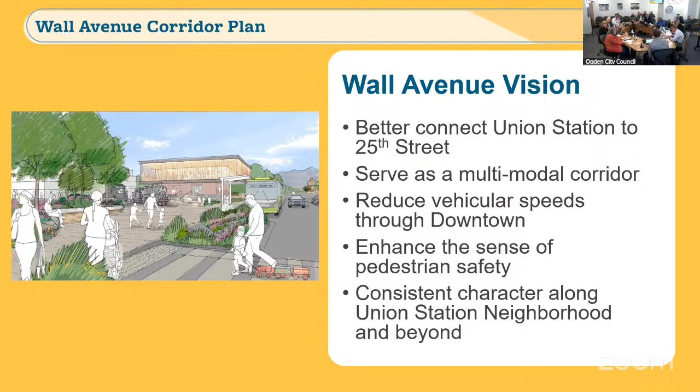As part of that, as we looked at Wall Avenue, we made sure to take into context the plan for the Union Station neighborhood and what is being proposed in this area and how it would impact Wall itself.

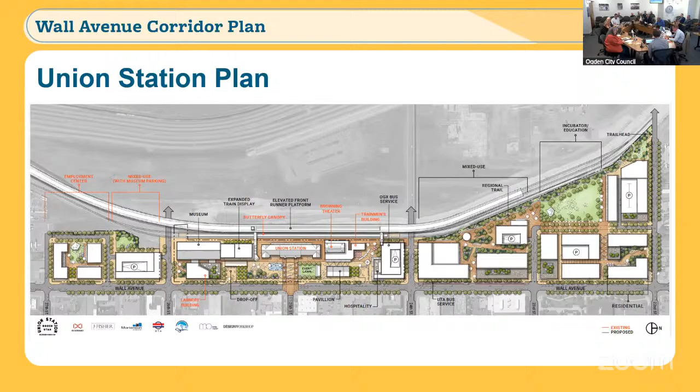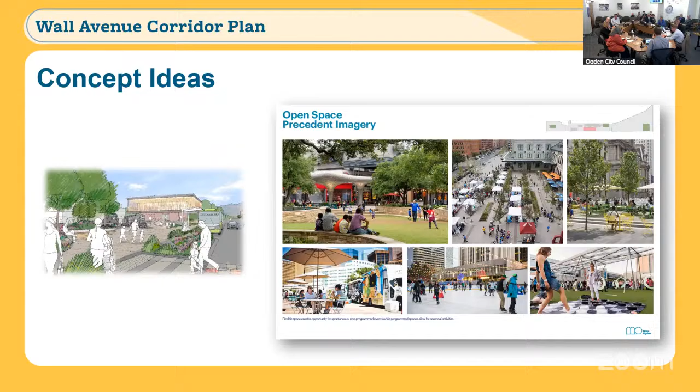Some of the concept ideas we looked at were ensuring everything we did was in line with station plans, the Union Station neighborhood development, and other areas. This is that open space imagery, that concept that has been proposed. And also how do we make active ground floors, active pedestrians, and make it an open spot where people feel comfortable walking.

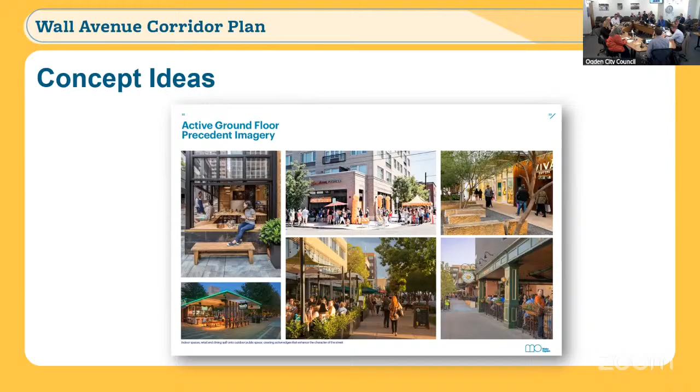Right here is one of those Union Station neighborhood concepts. It shows a lot of open space, a lot of vegetation, really a change into the downtown area through Wall Avenue.

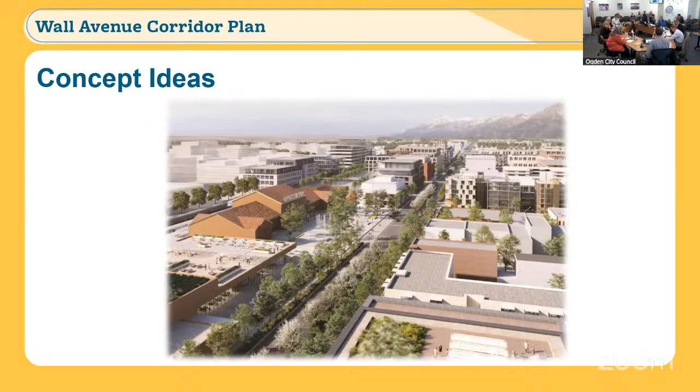The purpose of this project, as we kicked it off, was how do we enhance this vision. There's a vision for Wall Avenue and how it ties into the Union Station area. Particularly, I'm going to focus today on 22nd to 27th Street. The project looked at the entirety of Wall.

So how do we advance this vision through traffic analysis, determine what are the opportunities, what limitations, what is feasible and what's not, and then provide UDOT, because this is a UDOT roadway, with the foundation they need to make changes in the future, so that their changes align with the changes the city wants to make.

As we did this, the Union Station goals were making safe crossings of Wall Avenue, making it multimodal transportation, and using a variety of land uses.

One of the key aspects of this project was to engage a wide variety of stakeholders, including various folks at Ogden City. We had UDOT, a lot of Region 1 staff, UTA, Wasatch Front Regional Council, and several consultant groups - myself and Kimley Horn folks, Design Workshop, and J. Fisher Companies.

So there were multiple phases. This advisory committee was there to provide input, and then we took what we found to the citizens to get their input.

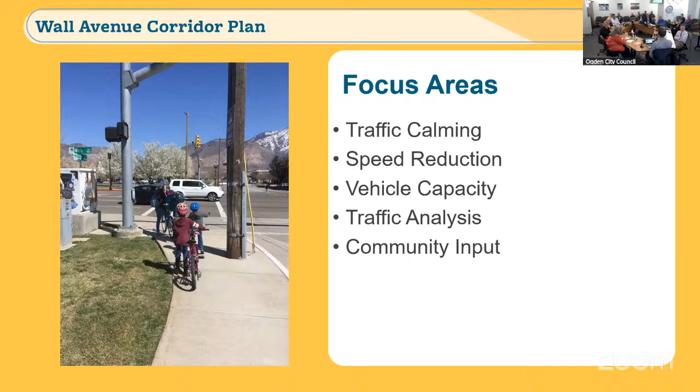We analyzed that traffic and brought this to the community for their input and feedback, through a variety of meetings including participating in Make Ogden. With this focus and with the advisory committee, we came up with several concepts. These next few slides will show you an overview of each concept, what's in it, and some of the pros and cons that we took to our stakeholders to consider.

This one has a big focus on pedestrians. There's always a potential you can just build an overpass, some sort of bridge structure to get them across Wall Avenue.

With this concept, other things would need to be done in coordination with it, but as we looked at this, yes, it does improve pedestrian safety, but it doesn't encompass all the things that we'd hope to capture on Wall.

The 255-foot approximate length needed for the ramps to meet ADA requirements would block vehicle and retail access on the streets where those ramps are, as you can see here. That's almost a third of a block.

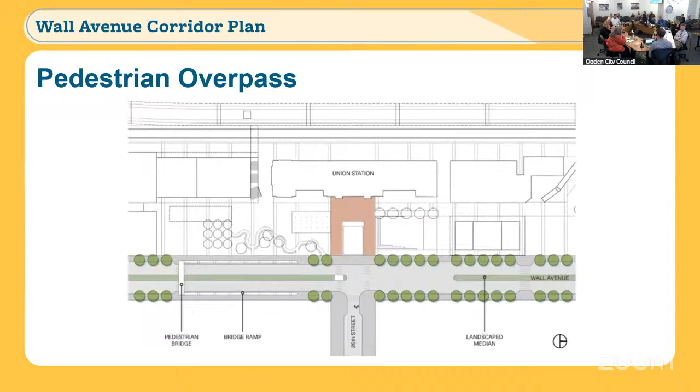It eliminates on-street parking where those ramps are located. It eliminates trees, amenities, and other items in those zones. And it doesn't really allow for biking infrastructure if you did it.

So this was one of those that, even though it was considered, it was not very high with the advisory committee or in the stakeholders' input, and wasn't one that received a lot of consideration moving forward. There were other options that they liked better.

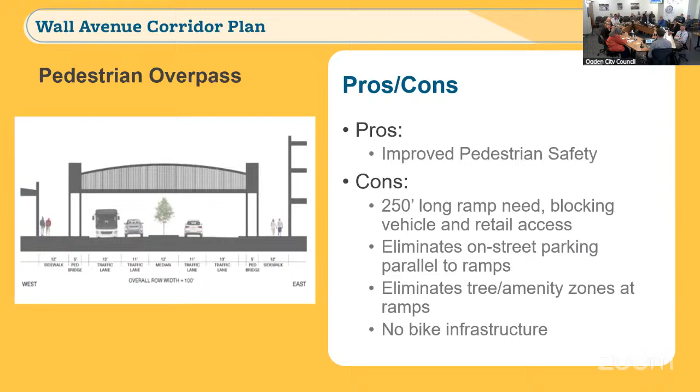Another one that was looked at is a bypass tunnel. Let's say we want to remove cars from Wall Avenue in this area at 25th Street, ramping them down. To do this, to get these ramps to not exceed the maximum grade and to get the clearance needed to have this pedestrian plaza underneath at 25th Street, those ramps would tie in somewhere around 24th and 26th.

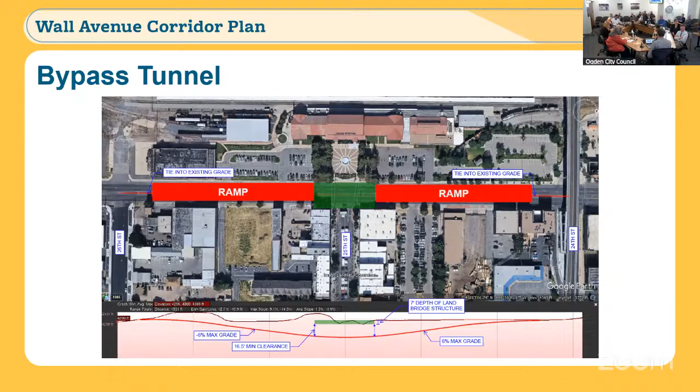There could be some changes—you could do it before or after those main intersections. But at a high level, as we talked with the advisory committee, it didn't appear like there was a big appetite to put all traffic underground. So that evolved into a bypass tunnel where there are 2 through lanes, one in each direction, as you can see in this concept, and 2 lanes that would stay at grade.

So you'd still allow vehicle access at 25th Street, or if they drop down before 26th and 24th, at those intersections.

Again, it creates much safer pedestrian improvements—there's a lot less exposure to vehicles. But as you can see, it would eliminate left turns from 24th to 26th and eliminates a lot of vehicle access. So say you were on 25th Street, you could only make a right turn and be forced to go north on Wall Avenue.

There would be a lot of major utility impacts and relocations due to water tables—a lot of dewatering required. It would be very costly and a very long-term time implementation.

This was an alternative that, for many aspects, had an appetite from the community and other folks. But one of the things we were tasked with is what can occur in the next 10 years, and this alternative felt like, even though it could be considered in the future, the timeframe and timetable mean it's not one that could be implemented over the next 10 years.

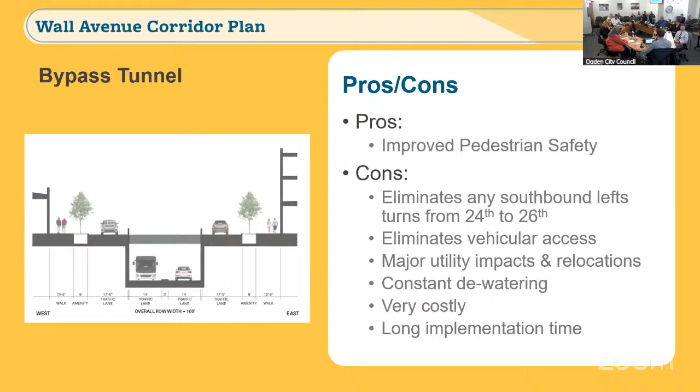Another one was what we call the Boulevard. What this does is create a large open space in the downtown area. You create this big boulevard, and as you can see here, it allows for a lot of trees and a lot of open space. It narrows the corridor down, which has those traffic calming features because you can narrow the lanes and create a tighter feel to the roadway, which naturally slows down vehicles.

But because of the median having no breaks, you're eliminating left turns on and off of Wall Avenue.

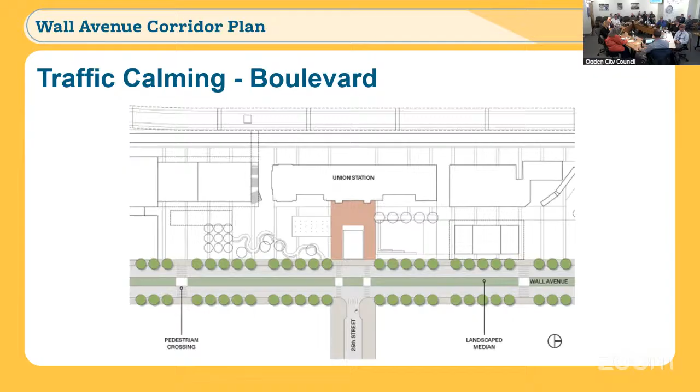It does provide the greatest opportunity for trees and improves safety, because pedestrians can cross two lanes and then have a safe space before crossing the other two lanes.

But it would increase travel times. People would have to find alternate routes instead of taking lefts, and it wouldn't allow for any on-street parking.

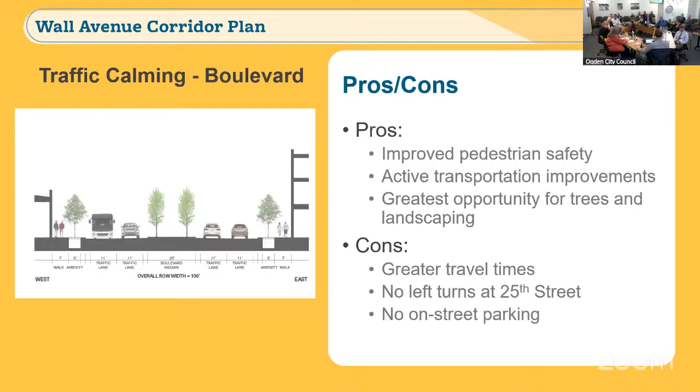So this is the first one that really implements these traffic calming features. We had three options that we looked at.

This one, traffic calming, included a lot of things like bulb outs, where you extend the on-street parking area at the intersections, extending the curb to bulb out farther. So when pedestrians step off the crosswalk, they're right there at the travel lane and don't have to walk through that parking area.

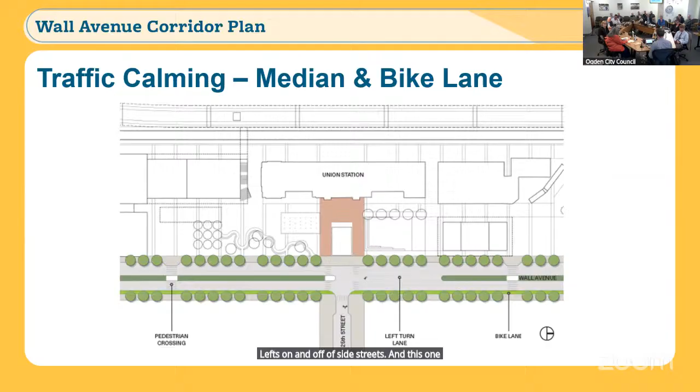And so this concept had the median. It allowed for those pedestrian mid-block crossings, and it also allowed us to break the median in key spots to include lefts on and off of side streets. This one focused on creating a bike lane, as you can see here.

There's a bike lane, so you remove some parking on one side to create a bike lane—not a multi-use path, but a bike lane—and then still maintain the parking on the west side.

This one's pros: it really did a good job of maintaining the throughput, the vehicle capacity. Because you're adding these traffic calming measures, you get improvements for all road users—slower speed, safer for the cars. You can increase the vegetation, the landscaping in this area.

There is a little impact to travel time, so vehicles would have a slightly higher travel time to get north-south, and there would be less on-street parking.

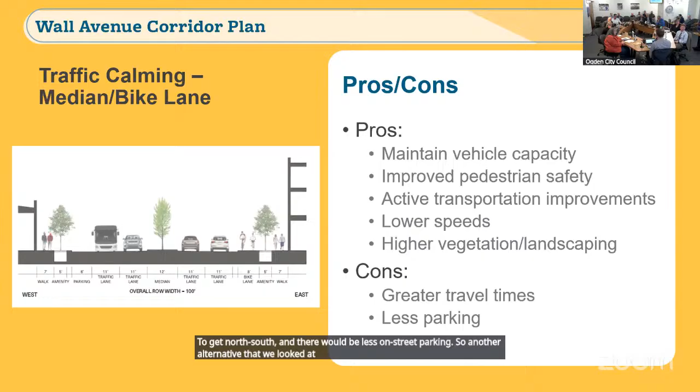So another alternative that we looked at was a modified version of this median. You've got the same features—the bulb outs, the mid-block crossings, the narrower lanes—things to help the driver feel like they need to go slower.

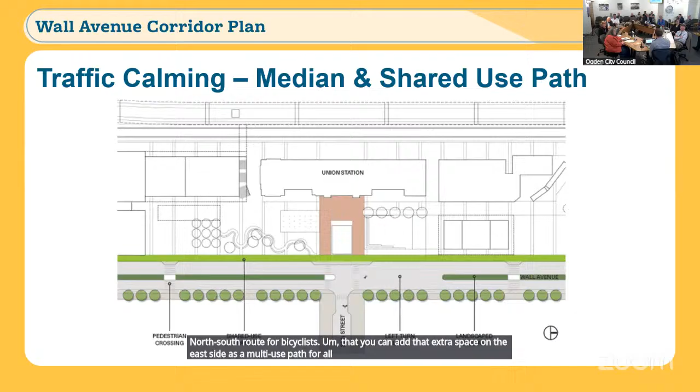But the concept here is that we create a multi-use path that bicyclists can use if they need to. Because we've done a great job of creating alternate north-south routes, Wall doesn't need to be the main north-south route for bicyclists, so you can add that extra space on the west side as a multi-use path for all active transportation users.

And so as you can see here, you've got a lot more space for those folks in that Union Station neighborhood. You still have the medians that improve safety and the bulb outs and these other amenities, but you can also maintain the on-street parking, which could be very critical as you're developing additional and new land uses along Wall Avenue to help those businesses.

So again, you maintain that vehicle capacity, you have the pedestrian and active transportation improvements, you lower speeds, but this is an alternative that is also quicker to implement. So it kind of falls into something that could be implemented within the next 10 years.

But again, due to the slower speeds and medians at some locations, there are potentials to increase travel times for vehicles. And in some areas, you're not able to get landscaping on both the east and west side just due to right-of-way constraints.

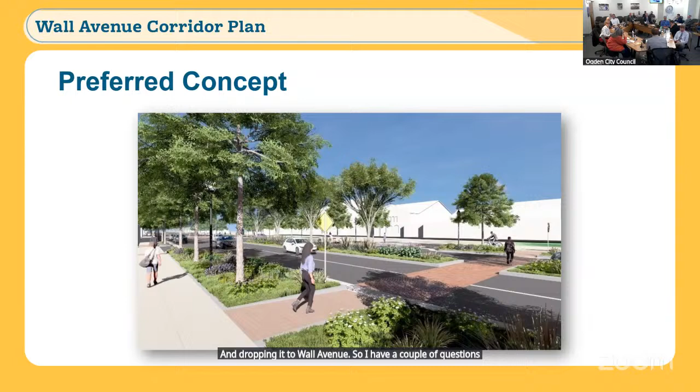I have a couple of questions. The active transportation corridor piece—is that in our bike master plan by any chance? Yes, it is. That's great, we don't have to change that.

Region 1 seems to be working a little bit better with cities up here—the 11-foot lanes might be a little bit slow for them, or not quite wide enough. Did you look at any other options besides the 11-foot lanes? 11-foot is done in some areas, but the 11-foot lane would require a deviation from their typical standards.

Part of why we're looking at that, 1 foot for each lane, is it just reduces the exposure to pedestrians. That's one of those details that would be ideal, because it really makes the road feel narrower, and the natural behavior of the driver is to slow down. So in our mind, that's a very critical piece of this.

Also having the trees, the vegetation, these bulb-outs that you can see here make you feel like you're getting pinched down, even though you do have sufficient room even for large trucks and semis to operate within those. It makes it feel restricted, so you will travel slower and it becomes a natural traffic calming.

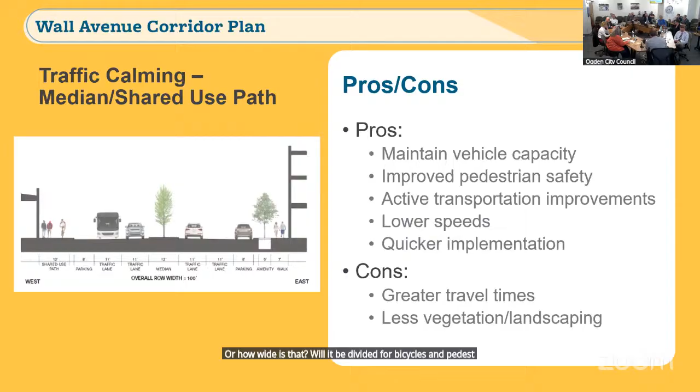There's several different ways you can do that. You can stripe it for bicyclists to use one side. It's that concept of that open space. It really requires the pedestrians and the bicyclists to be courteous and pay attention to one another. It's not intended to be a high-speed throughput.

Those folks would be on your streets that you've developed, on Grant, which is your main north-south, and improving the east-west connectors. So you would prefer those high-speed or commuter bicyclists to use Grant and then come over where they're trying to get to on a westbound route.

Okay, and I see in your rendering here, we've got a stripe kind of separating wheeled transportation from foot traffic.

Do you remember when we were in Germany, in Munich particularly, they changed how bikes and pedestrians shared the same width, but they changed the surface of the path. The bikes had a smoother surface. They used cobbles everywhere down there, but not on the bike lanes. That's how they made the distinction between the bike part and the pedestrian part, just by changing the surface.

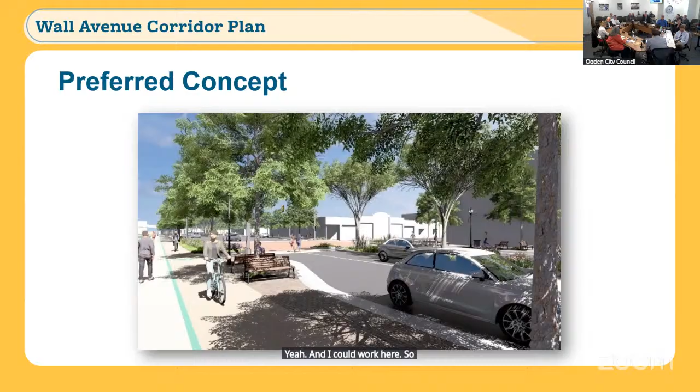I like the progress that's been made, and I like the preferred concept. I think you make good points around why it's the preferred concept when compared to the others. Thanks, so yeah, that's where we're at right now.

We're working with UDOT to make sure they agree with the analysis we've done before we finalize the report, and work on getting a corridor agreement in place with UDOT as a final step in the process.

That's probably where my question is — how do we get UDOT on board with a thing like this? Well, yeah, we've tried to involve UDOT throughout the entire process. They actually helped fund this corridor plan.

Ryan Halverson, he's the Region 1 planning manager, has been involved throughout the whole process. We've met with UDOT leadership twice and received their comments, and now we're currently waiting on their second set of comments. We're trying to resolve all the concerns that they have.

We're hoping to do a corridor agreement so that what we show in the plan is what will be supported by UDOT — that's our ultimate goal. We don't want to adopt this plan without a corridor agreement in place, because it really doesn't do much. So if the city is behind this, I think that will go a long way. We feel like—

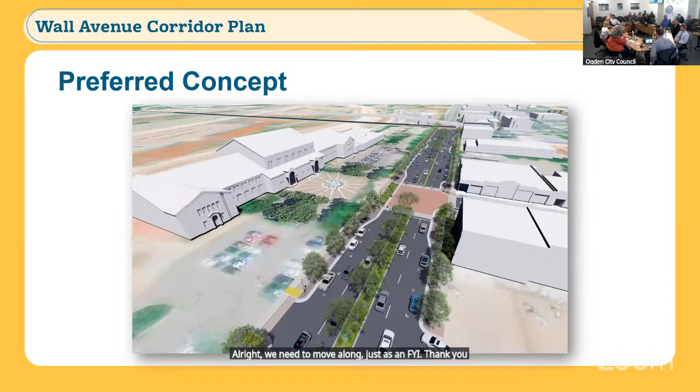There's going to be a briefing at the EOC regarding the Ben Lomond shooting, or Ben Lomond incident, today. So if I'm asking you, would you like to break and listen to that? We can try to figure out how to pull that up. We can make that work. I would like that.

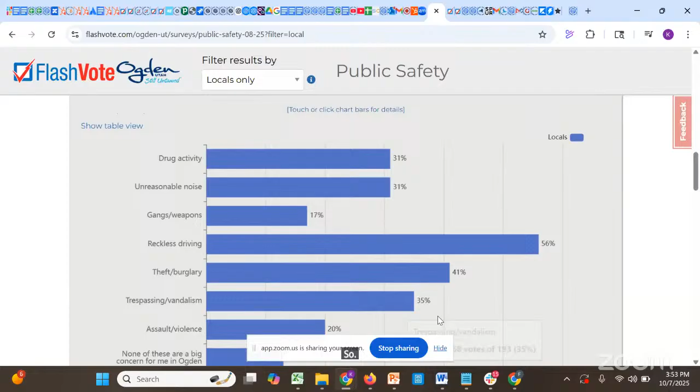Moving on to number 3: which of the following are your biggest concerns? Tend to think of these as groups. Number 1 is reckless driving, which is the one with the majority. Then in your next group you have theft, burglary, and then drugs, unreasonable noise, trespassing, vandalism. You can see differences using any of those filters—what people are concerned about, and how that varies by age or gender and so on. Again, nothing huge actually. Sometimes you'll see big numbers for some of these, and by big numbers I mean well over 50%.

The last one was really more open-ended, and you're sifting through this for ideas: is there anything you think the police department could do that would have a noticeable impact? You had a nice chunk of people, 41%, volunteer some idea. Not all of them will be helpful, but you can sift through, and hopefully there's a few things that will catch your attention and seem useful. And of course the catch-all at the end, any other comments or questions—same idea, you can sift through that.

I'll pause there for questions before I show you one other thing. Any questions so far? Yeah, and no's fine too. No, I think we're good. Go on, all right, good.

So I'd still have my screen, right? Yep. I pulled up the district one. So that's a fun one to look at. I'm sure you guys have some individual special interests in some of these.

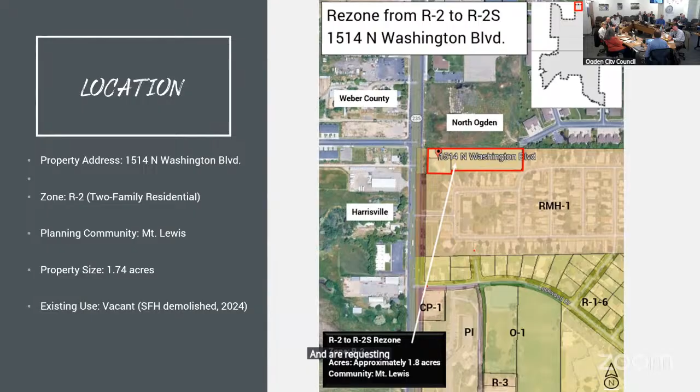They're requesting a zone change, and they're able to do that. The R2S would increase the amount of development they could do on it. The R2 allows single family and duplexes. The R2S would also include single family row houses, as long as they're subdivided to allow individual ownership of each unit. It would allow a minimum of 2,500 square feet per dwelling unit.

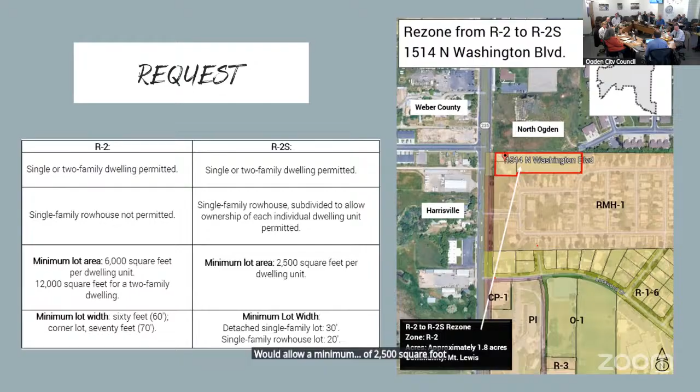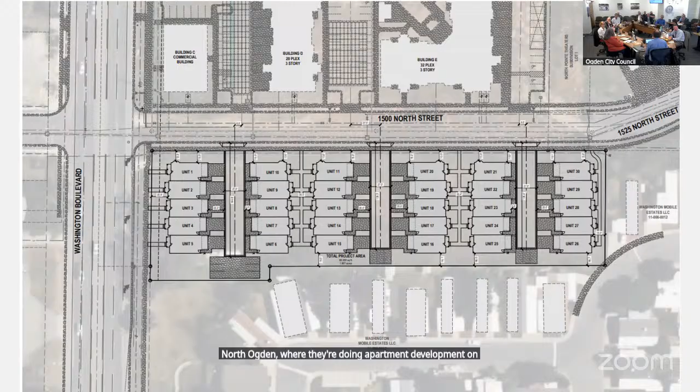There is an associated request for a community plan amendment. The simple reason is the community plan says this particular property should be rezoned from R2 to R-1-6. So if we do this, we wouldn't be following the community plan. So they're asking to amend the community plan to have it be from R2 to R2S.

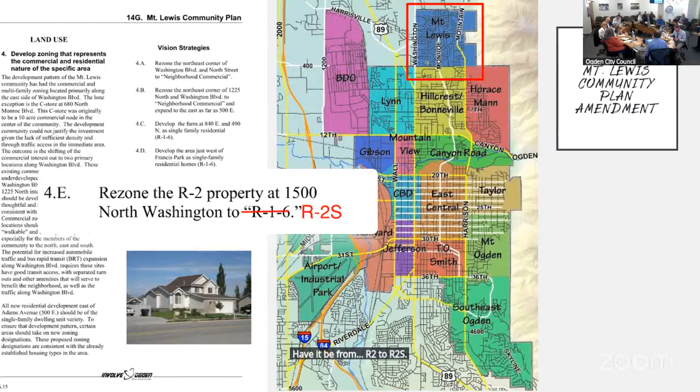The general plan has various factors for consideration. I'll go over a few of these. One is that the zoning should reflect the prevailing character of the overall area. This is an interesting area because on the south you have the mobile home park, on the north you have apartments, to the west you have townhomes, to the east you have townhomes. So it's more of a townhome-apartment sort of area than an R-1-6 area.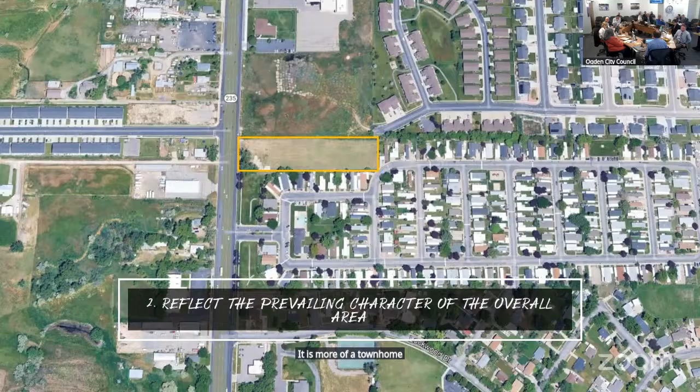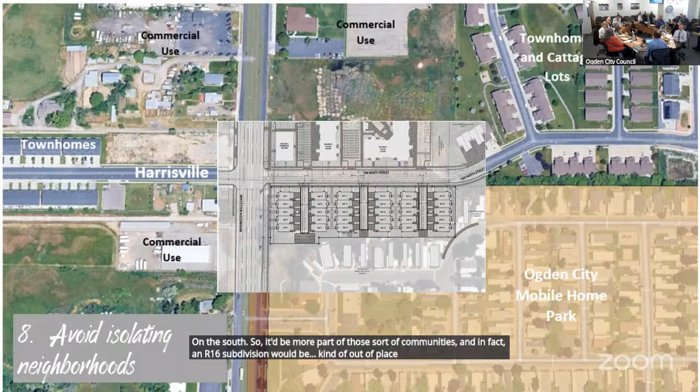Another factor is to avoid isolating neighborhoods. This development would tie in more to development happening to the northeast and west than to the mobile home park on the south. So it'd be more part of those communities, and in fact an R16 subdivision would be kind of out of place and isolated. So it does seem to meet this criterion.

So the Planning Commission has reviewed this, and they recommend approval of both the zone change and the community plan amendment. They are recommending a conditional overlay with a condition that the owner enter a development agreement limiting the dwelling units to owner occupants for a period of 10 years after occupancy. That concludes my report.

The backflow and cross connection control ordinance is definitely due for an update. It was 1991 the last time it was touched. I've been in the position for almost 4 years, and Joseph Swift is our other administrator that helps us out. So we'll jump into this, try not to spend too much time. I want to help define our purpose and what situations we get put into to help us protect Ogden City water.

Backflow is the undesirable reversal flow of water, and cross connection is either a direct or indirect connection between potable water and any undesirable source. So basically that can just be something happening around town because we're all connected.

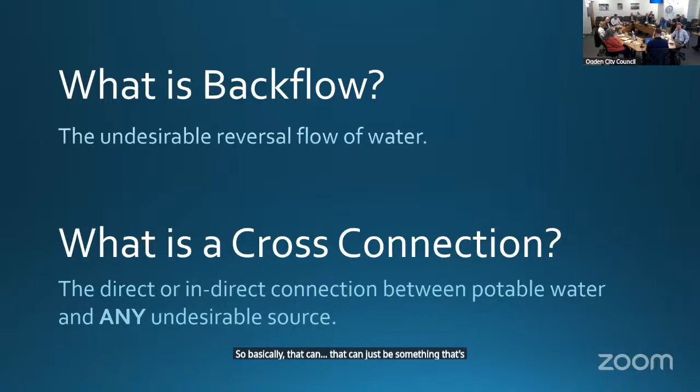So the cross connection ordinance, the purpose of it is a state and federal requirement. The Safe Drinking Water Act of 1974 was developed in direct response to public outcry in the 60s and 70s, after about 46,000 cases of dangerous water out there. That trickled down to the state, which uses the Utah Division of Drinking Water. The R309 is our legislative rule that governs the Division of Drinking Water, and they impose upon every water purveyor to have a cross-connection control program. Part of that R309 is the state asks that every purveyor has 5 elements of a cross-connection program, one being the local ordinance and local authority statements. All of this is in the interest of protecting Ogden City's water supply and the enforcement of an effective cross-connection control program.

So who should know about this ordinance? First off is backflow testers - these are individuals who are ABPA certified, that's the American Backflow Prevention Association. Every assembly has to be tested at least once a year. Contractors should know about the ordinance. Our citizens, that's part of our public awareness program, one of those 5 elements. The city, yourselves, the plumbing supply stores around town - we do drop off pamphlets to them. And then inspectors, that could be third party or city inspectors.

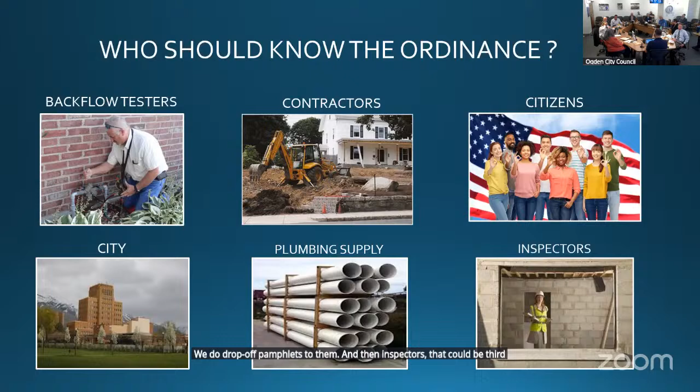So we are fortunate enough to work along building services and fire to review plans for new buildings and remodels where plumbing plans may be altered. The picture on the left is an absorption chiller room going up in the new Sam Williams building, and on the right is our Marshall White Community Center fire riser that we were able to approve. So we approve these plans, we add notes in red for the contractors to follow up, and perform our pre-occupancy inspections alongside our city inspectors.

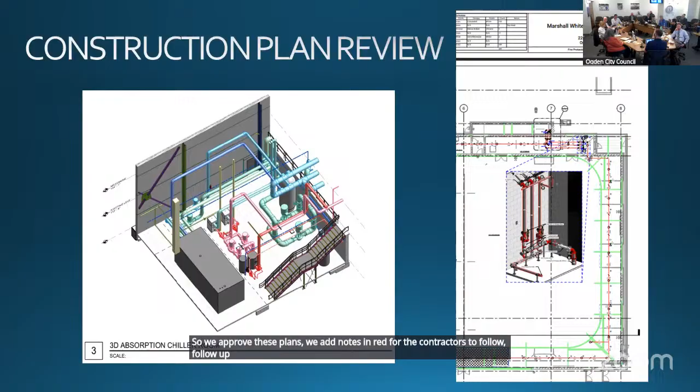Part of that new construction, we are looking at fire suppression systems. The picture on the left is the fire suppressor at one of the BDO buildings - this was installed as a core and shell permit where they build it and hope for a tenant to come in. The building water supply is on the right, that picture is kind of convoluted - it's called a pressure reducing station. On the bottom is where the backflow preventer is, and you can see where the white pipe leads into the floor drain.

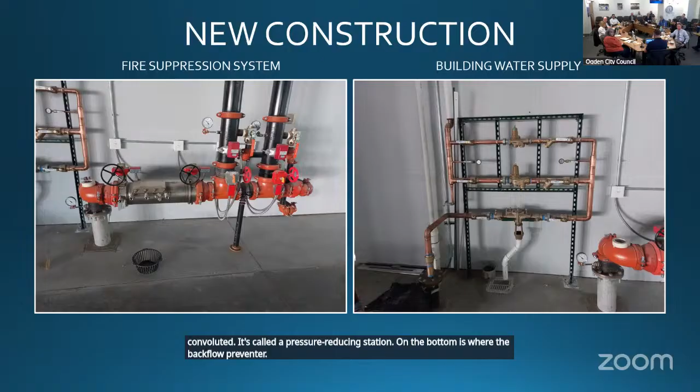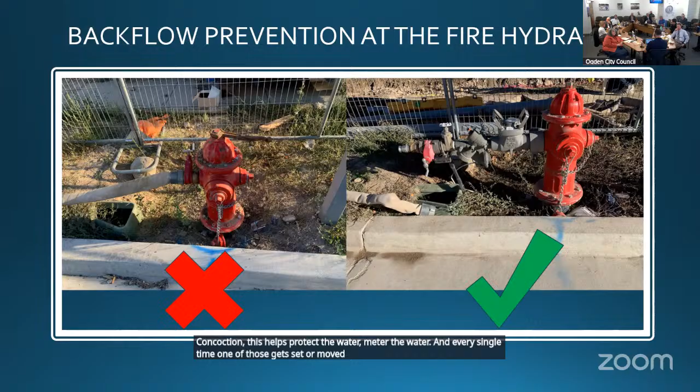We also work with the Weber County Health Department. This is the chemical dispenser setup, typically above a janitor's closet. On the left photo, you'll see that black hose leading directly from the faucet up into the chemical dispenser - that's a code violation that we find. On the right side is the backflow preventer hooked up. At the top right of that photo is another one of those testable pipes, and that is per the code. It has its own dedicated water line and is installed at the correct height above the chemical dispenser.

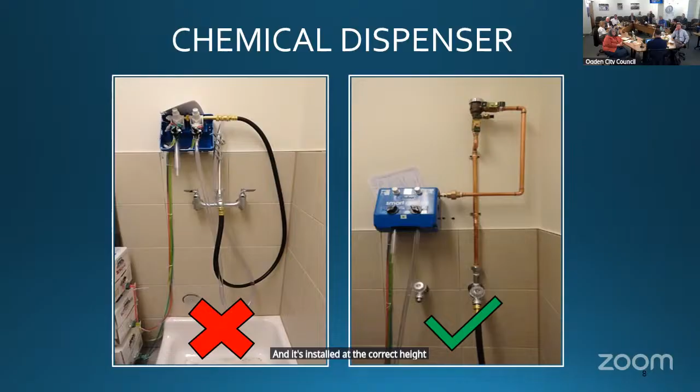We also clarify proper installation around town. The ordinance does allow us to utilize the plumbing code and enforce our own city engineering standards. This photo is of our engineering standard for what's called a swing connection, where somebody uses secondary water on their property, and when they kill that line in October every year, they also want to keep watering because they might have a couple more weeks of good weather, so they'll hook up their culinary system. Obviously, that's a cross connection, so the installation of a very specific type of backflow assembly is initiated.

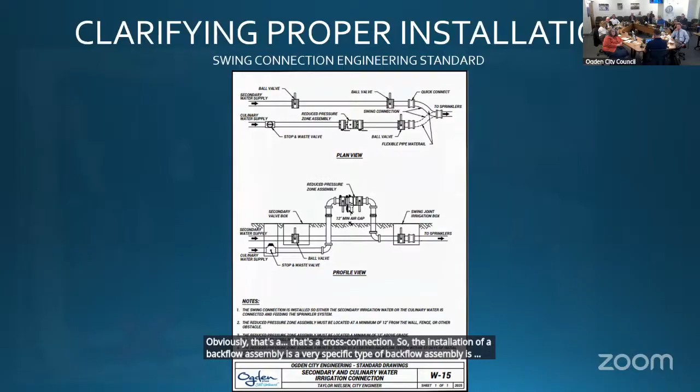We'll go out and find them. On the left picture is our swing connection - you can see the flexible red hose that goes between the two sources, and it would normally be approved, but it's not above ground in the type of backflow preventer that it needs to be. On the right is one along Skyline that we know of and make sure it gets tested every single year.

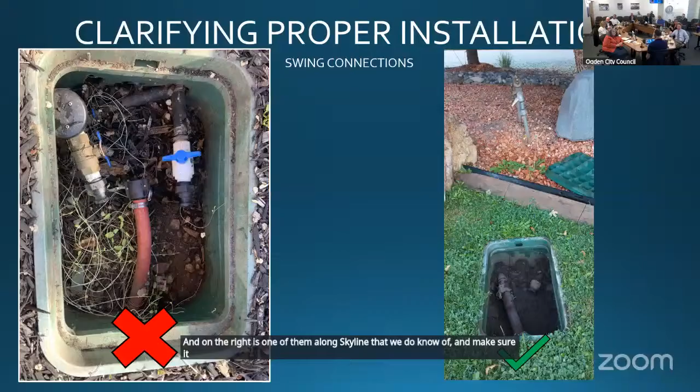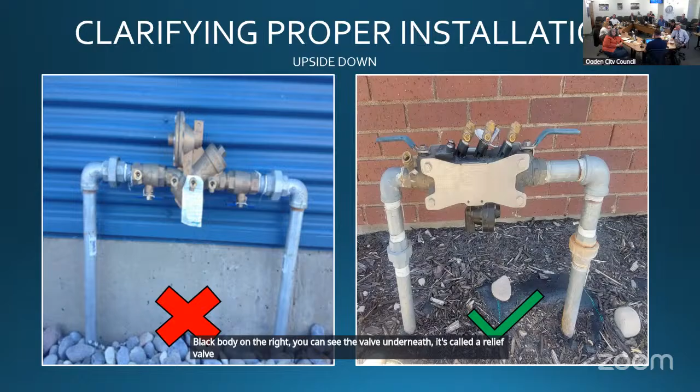Some of them get upside down on the left there. These come with installation instructions from the manufacturer, but sometimes they're not followed, so we have to come in and make sure they're properly installed, like on the right there. That plastic black body on the right, you can see the valve underneath. It's called a relief valve that allows water to discharge if there's a backflow event, when water tries to go in the opposite direction. They need this side up.

So this ordinance update will help define clear definitions and verbiage in case anybody goes searching for them, and we also keep a copy on hand in case anybody wants to see it. It gives more references to our current plumbing code, which, as you know, gets updated every 3 years and adopted by DOPL. It's got removal of verbiage referring to grandfathering, which violates plumbing code. That's something that's installed that no longer meets standard codes, and we have to make sure for safety reasons that things are updated.

We do public education awareness. This ordinance update will help us continue getting community involvement.

This photo on the right shows our temporary setup where we've hooked up a siphonage model. You can't see behind the little photo of the building, but there's a tiny pool we fill with red food dye, so the kids can visually see the water moving in the opposite direction. We simulate that there's a fire hydrant being flushed.

This will help with our continued enforcement as well. With stronger verbiage and clearer definitions in this ordinance, we'll be able to seek less resistance when we're asking somebody to update something around town.

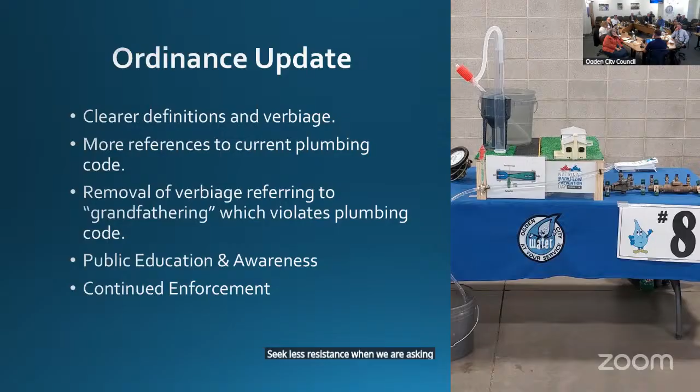Any questions? I'm curious about a couple things. So does this impact residential, commercial, industrial, and municipal?

Yes, absolutely. The plumbing code for commercial and industrial is almost a mirror copy of what's in the residential. Currently, we've tackled probably over 90% of the industrial commercial side, where most of the major backflow concerns could exist due to the chemicals being used and such.

Residential is a beast in its own. With two of us working with the purveyor and being administrators for them, we get limited time to work on residential. So that's where the public outreach and awareness really comes into play.

And getting to the residential, we're an older built-out city, and I imagine there's a lot of non-compliance in our residential neighborhoods, yeah? We find it often, yes. So with that, how do you assess the risk of water being contaminated as a result of residential non-compliance?

So we do go out and perform hazard assessments. We don't typically go out of our way with residential, as there's over 30,000 service connections, so we rely heavily on plumbing pamphlets and handouts. Anytime somebody calls in to have an inspection, we jump right on it. We're more than happy to inform the residents and give them anything they need to get moving with it.